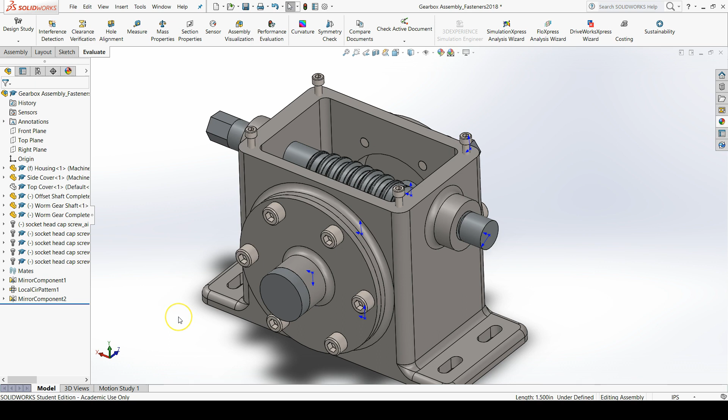So, to illustrate this tool, I'm going to use it on the offset shaft here. Just for your information, this is also called a worm because it's the thing that's driving the worm gear. That was just a little freebie there.

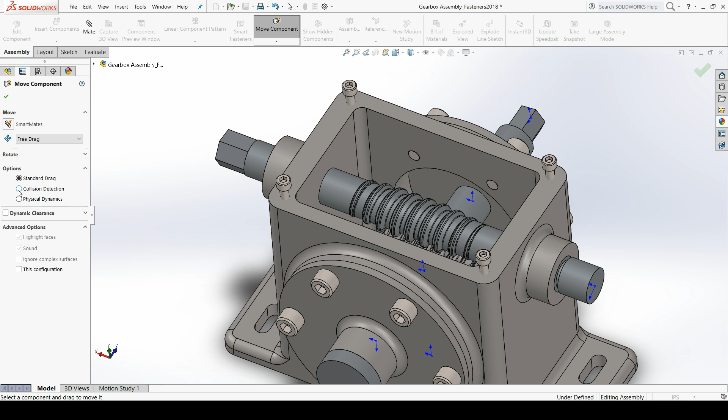And to find collision detection, it's not very apparent on the command manager. It's within the move command. So if you go to the assembly tab and then click on move component, one of the options in the move component property manager is collision detection. So click that bubble, and then we can either do collision detection on all components or select components, which I'm going to do here because I only want to focus on the offset shaft or the worm and the housing.

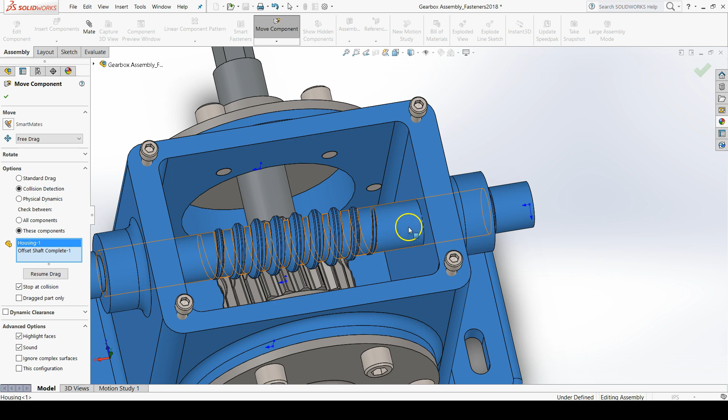And then I'm going to make sure stop at collision is selected and that it will highlight the faces that are going to be colliding and make a little sound when they have collided. So now to test interference detection, I need to drag the offset shaft in a couple of different directions to see if it's going to collide with the housing when I remove it. Oh, and it doesn't move. I wonder why.

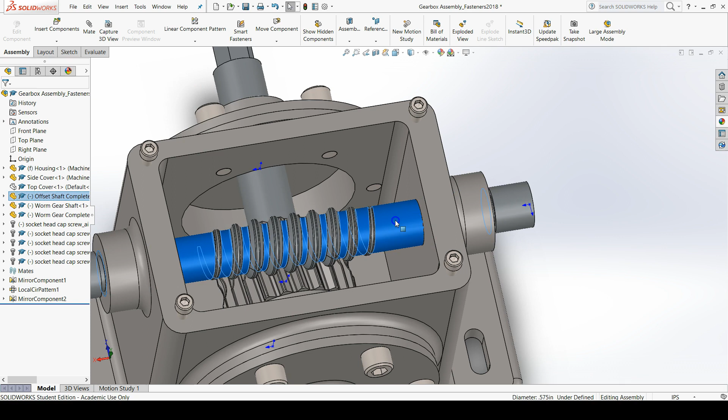The key here is, to use collision detection, if you're going to move a component that you had constrained in a certain way, you need to suppress that mate first. So the mate I want to suppress on the offset shaft is the coincident mate between the groove face and the right side mount face. So I'll go over to the mates folder. The mates folder is right here in the feature manager design tree.

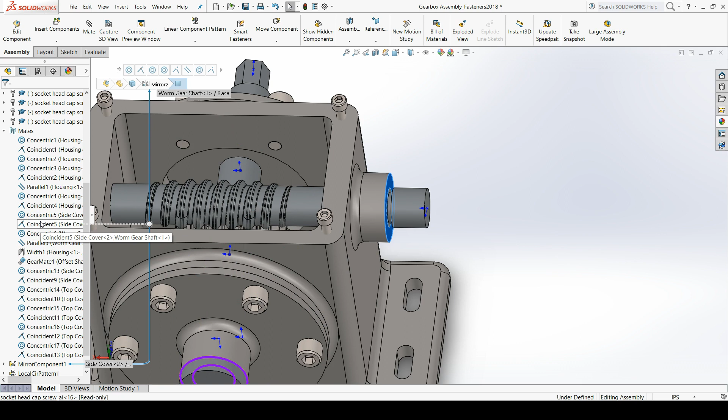And I'm going to find the coincident mate, where is it? I feel like I'm close. Not that one. There it is. I was on the wrong side. So I'm going to suppress this by right-clicking and hitting the suppress icon in the pop-up toolbar.

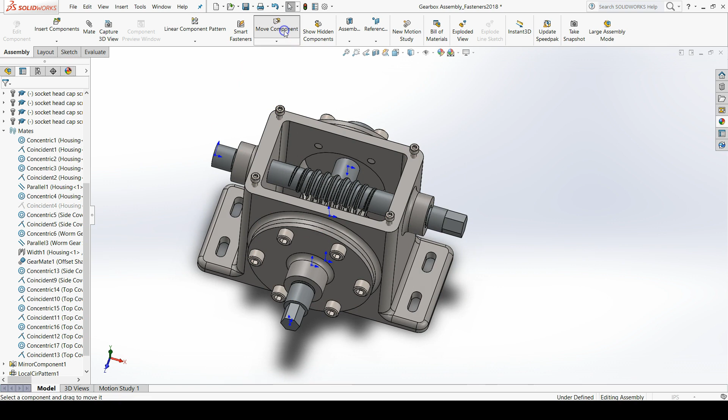And now when I go to collision detection, which is within the move command, I'm going to select my components again. And then I will click on resume drag. This will allow me to get into the drag mode, and I'm just going to drag the component in a couple of different directions. And it looks like I hit a stop and I've already collided.

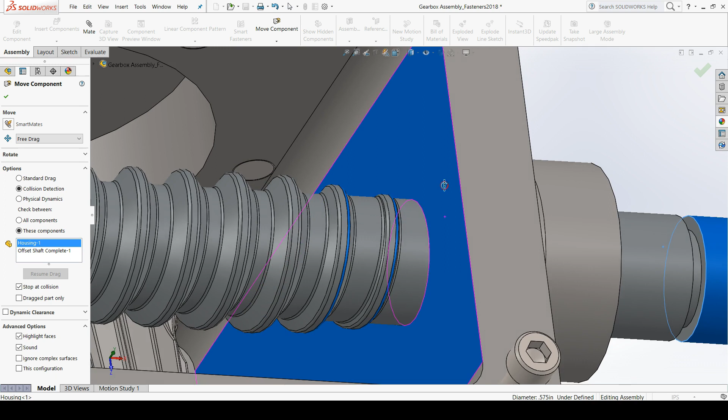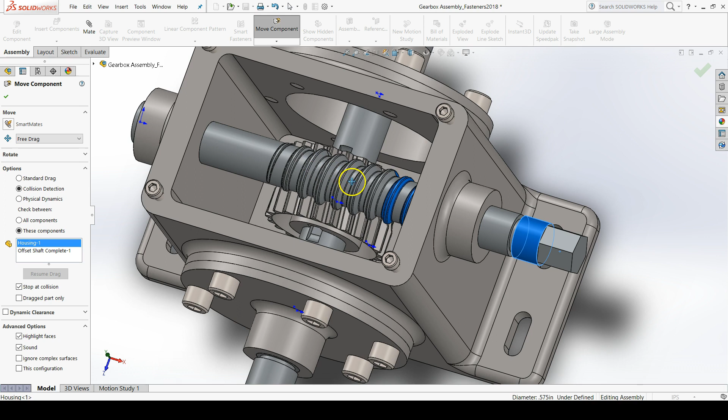Huh. The gear part of the offset shaft is colliding with the housing. So it looks like there's actually a situation where I can't even assemble this offset shaft into the housing. That's very interesting. So I have a problem here. I'm going to have to redesign my housing to allow me to get the worm gear inside this area first, but still be able to mate very closely with the shaft portion.

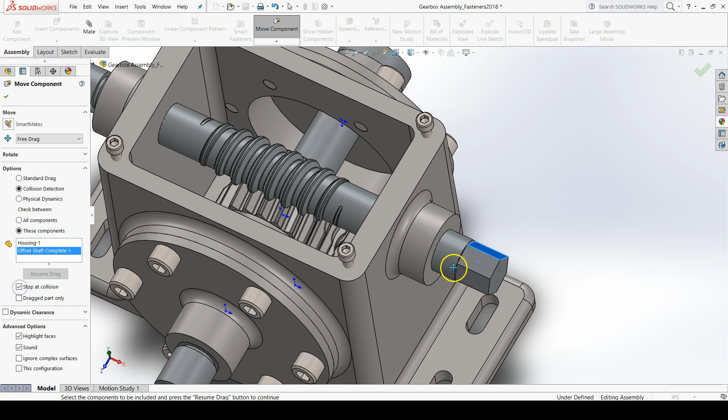So I'm going to illustrate that again. So move component, collision detection, and then, whoops, select the components you want to do collision detection with. Oh, I have collision. I need to click stop at collision. It stopped right there. So this thing is stuck inside here. Do y'all see that? This thing is stuck inside here.

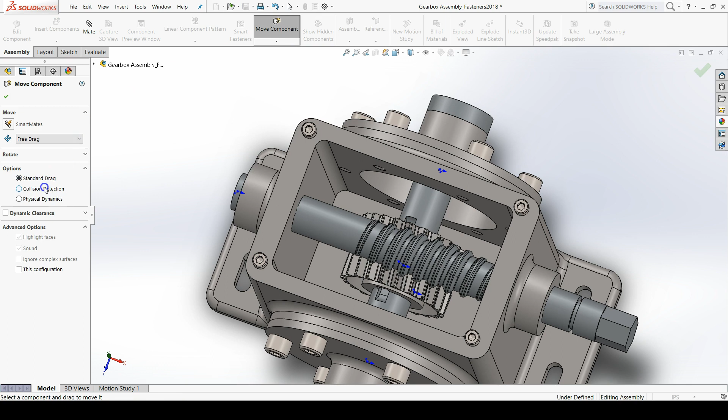So some good notes to take on collision detection would be, first off, it's inside the move component command. So you can open up Microsoft Word and say, hey, this collision detection is inside the move component command, and it's right here. And the other very important note you might want to take would be that you need to suppress the mate that is going to restrict the movement that you're actually going to test out.

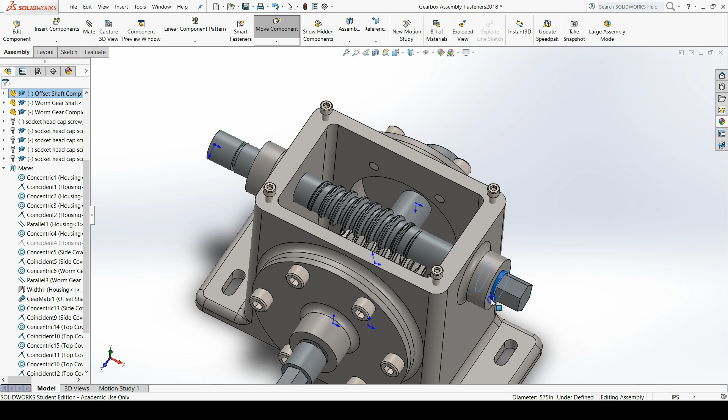So I wanted to test out moving this offset shaft into the housing of the gearbox. So I needed to suppress the coincident mate between the left face of the groove and the right face of the side mount.